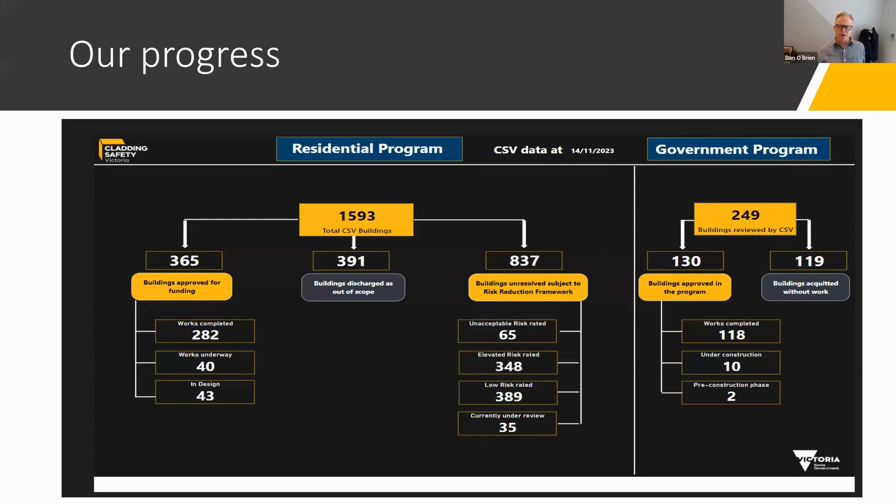Sorry, Dan, when you say risk, you're talking about risk to human life, aren't you? Yeah, that's exactly right, Kim. It's risk to human life, but it's also risk to the building. So what we're trying to do is limit the amount of exposure that a building may have to a cladding-related fire. So that's a really big and important part of it. If a building gets engulfed, but people can still get out, that's not success. So we're trying to reduce both risk to human life and risk of building damage, which I think is important from an insurance perspective.

Now, let's go back a step. What are we talking about? We're talking about different types of cladding on different types of buildings, right? And in Victoria, and I think this is a really important takeout from here, we have identified more buildings with different types of combustible material on them than anywhere in the world.

And that's because we've not looked just at the tall buildings where there's a vertical run of ACP polyethylene. In this picture here, you'll see that. This type of building configuration featured in the Neo fire in Melbourne and also the Lacrosse fire, where there was a fin of combustible material racing up the side of the building, and balconies were exposed. And in fact, the fire started on the balconies and raced up the outside.

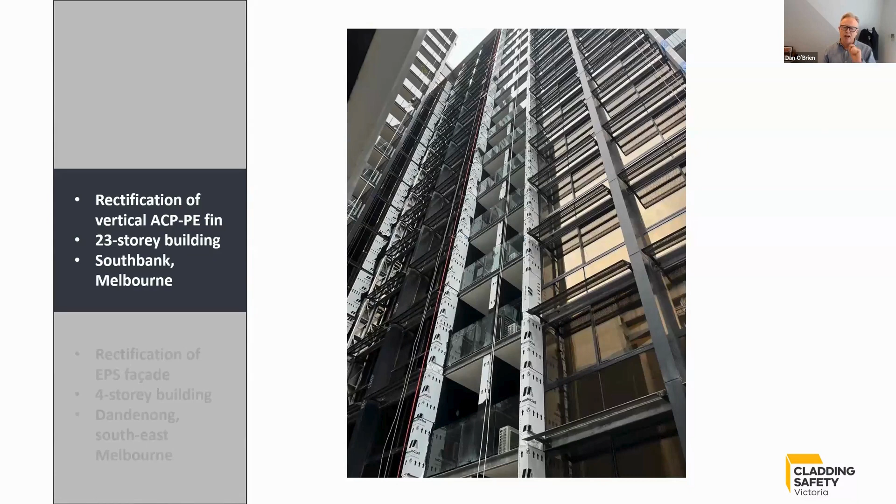Now, when I first joined this program, that's what I thought I'd be dealing with the vast majority of the time. And in fact, we've gone onto those very, very quickly to make sure we've been addressing those types of buildings. A genuine unacceptable risk on these buildings, 100%.

More often, in terms of the fleet of buildings we're looking at, it looks like this, right? This is a 4-storey building with expanded polystyrene. Expanded polystyrene is around about 10 centimetres in thickness, and it's just like an esky foam. And for those that haven't seen it, it is concrete rendered, and that's got about 10 or 12 mil of concrete render over the top of that.

Here we've delaminated that concrete render, and we've exposed the EPS, and you'll see at the bottom there the EPS extending to the balustrades, right? So there's a fair bit of risk on that particular building, and the EPS would be replaced with a product called Hebel, which is sort of a concrete-based product, and the balustrade probably would be replaced with a cement fibre sheeting, so a CFC sheeting, again, non-combustible materials.

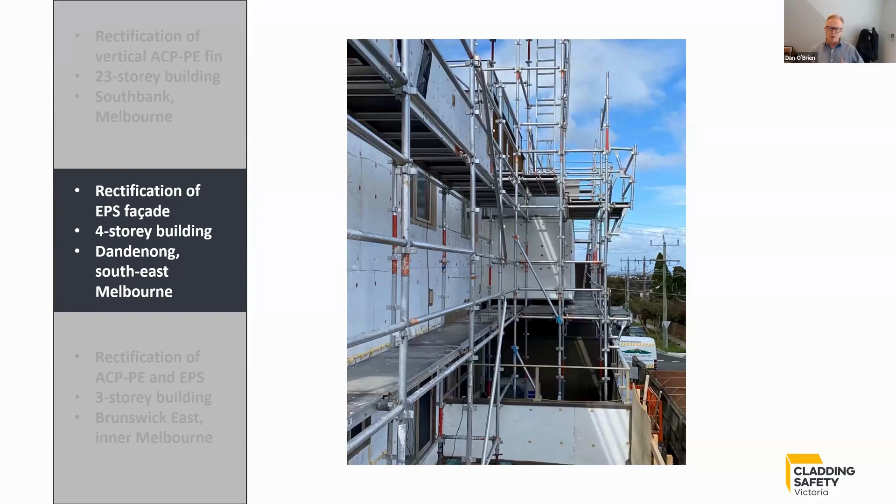So the 4-storey buildings and this type of building here, at the top, you'll see a mix. It's a 3-storey building with a mix of ACP PE, with a polyethylene core, and expanded polystyrene. And so this building would be no more than 9 metres in height. I want you to keep that in mind, because nowhere else in the world are people focused on buildings below 11 metres, right? And yet this type of building would represent about 40% of the fleet of buildings I'm looking at.

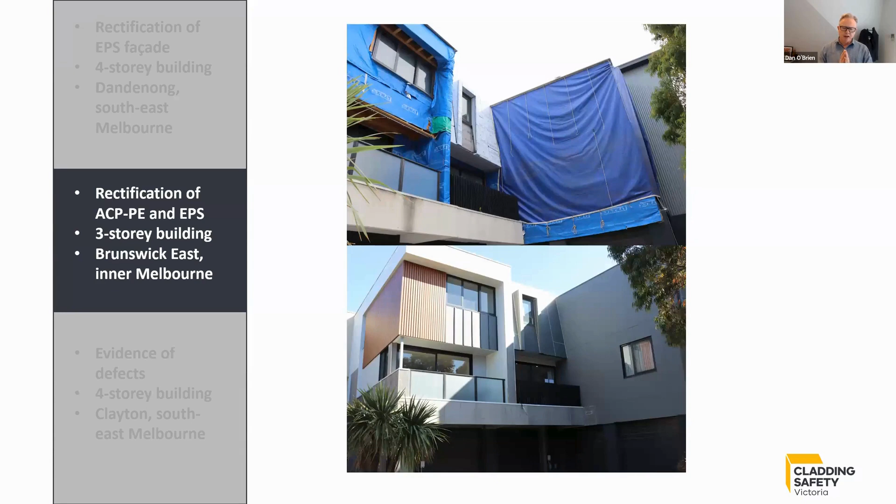Okay, so in Victoria, we've set the bar, we've had a low risk appetite to keep this product in the built environment. And we've looked at different types of products, whereas in other jurisdictions, they've really focused on ACP PE, polyethylene core, where the building is 18 metres and above. And I'll show you what that looks like in a moment.

So what are we looking at? This is a bit of a look at the different types of buildings that we've got around the world. You look up cladding fires on YouTube, and you'll see ongoing, horrific, escalating fires. And of course, we've had the fires in Melbourne that I've spoken about. That's the Neo building, a 42-storey building. You can see that vertical fin area going up, and it went up very, very rapidly. A fair bit of building damage, but fortunately no loss of human life or injury.

And the same with the Lacrosse fire in Melbourne, which, as the crow flies, would only be 200 or 300 metres away. Now we've seen the other buildings in Shanghai in 2010. I could put up a whole lot of other photos as well. Of course, the terrible tragedy in London in 2017. But if we look at the types of buildings that the rest of the world's focused on, it's not the buildings that we've got in the problem set in Victoria. And it's a really important point.

Because they've established a sort of de facto risk threshold to say those buildings aren't as risky because you can get out, right? Because first responders can get there and put the fire out quickly. Much easier to deal with those types of buildings. But in Victoria, the risk appetite has been set a lot lower. If you look at the bottom there, 49.4% of the buildings I'm dealing with are 3-storey, 24% are 4-storey, 8.3% are 5-storey. So really, the buildings that the rest of the world's focused on are 6 storeys and above, which would represent around about 18.3% of what I'm looking at.

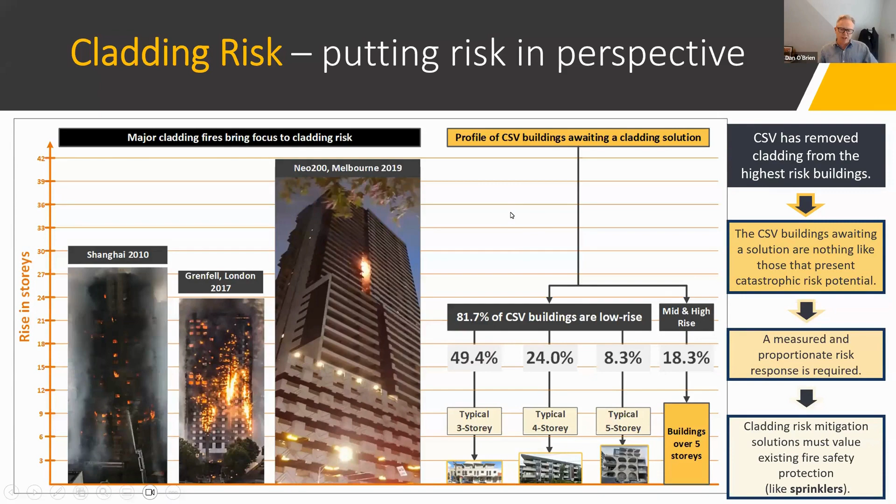It isn't typically the type of buildings that we're dealing with. We're dealing with buildings with setbacks. We're dealing with buildings that have got clusters of combustible cladding in certain spots. Sometimes where the cladding sits, it poses no risk whatsoever. There's no way it could ignite. And we've done a lot of work to work out how to mitigate that particular risk with different types of interventions. And we'll get onto that now.

But just to give you a sense of perspective, if you look at this chart, this is across jurisdictions. You can see Victoria is dealing with a hell of a lot of buildings compared to other jurisdictions. This is a bit out of date; the UK is now looking at buildings between 11 metres and 18 metres, but they're looking to adopt a risk-based approach for them. Prior to that, they were focused only on the 18 metres and above. And in the UK, in Scotland, the same.

So most of these jurisdictions are focused on those taller buildings or have a smaller problem set because they haven't looked for expanded polystyrene. Right, in Victoria we've looked at both products as being potentially risky. And I can't believe to see that amount of expanded polystyrene on a residential building, if low rise. It's absolutely amazing that that's one of the things that you've found.

Now there's been a question come through, and I wondered if you wouldn't mind answering from the Victorian perspective. Yeah. Kieran Conroy has asked, who bears the cost for the remediation, and is the government helping in any way? Yeah. So from a Victorian government's perspective, back at the end of 2019, they put $600 million towards this issue. But importantly, they put a levy in place, which is a cladding levy. It's based on the building permit, which we collect and we use to directly invest in the removal of the cladding.

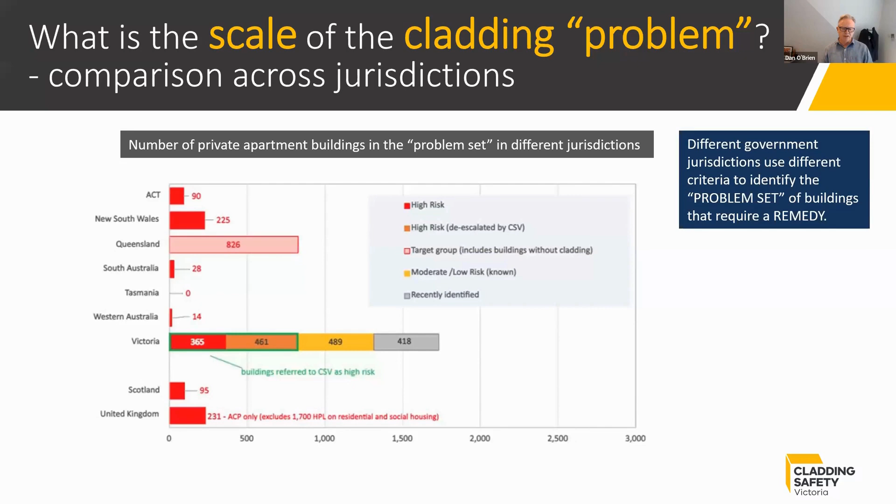Yeah, I'm aware of a building in one of the other states, a reasonably high-rise building, maybe 20 stories, and their cladding bill to remove some fairly severe cladding, obviously outside of this scheme, was $14 million. So that was quite the special levy that those owners had to raise, and it was a really huge decision for them. Yeah, it's a huge decision, right? Particularly in these 3 and 4 story buildings in the outer suburbs, it means some owners have negative equity. If they have to fund it directly, it's a considerable cost.

We've been able to use our approach to mobilise builders, get the approach overseen by a clerk of works program to make sure the quality is good. We've been able to control all that because it's not difficult work, but it can be tricky, and you're always interfacing with live buildings, right? People aren't leaving these buildings except in a rare instance. And so we're dealing with live buildings, and it's messy work, particularly with the removal of expanded polystyrene. It gets really, really messy.

And the tall towers are tricky. We've got people in dangerous situations removing this stuff. They're working off ropes. It's not something you want to do, really, as a builder. And it's very difficult after the event to deal with this stuff. But we've made great progress, and we'll have all of that cladding work retired by the end of 2025. So we're going well.

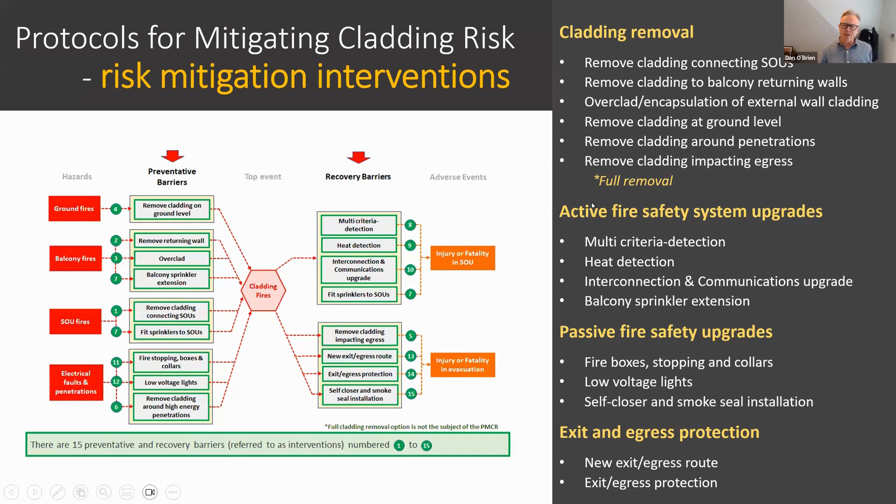It's incredibly interesting, though. I think the work that's been done as far as, you know, this classification of risk, looking across jurisdictions and also looking across frameworks that might not have necessarily previously been applied to residential buildings and that sort of thinking.

I think one of the things that stands out for me, and I'm wondering if you were surprised by this, is how, despite having one issue, cladding in residential strata buildings in Victoria, you can't have a one-size-fits-all approach for these issues, and that there's so much depending on the type of cladding, where it is, where the building is, the height of the building.

Have you had any surprises through your work on this? What surprised me, Kim, is that you actually start at the premise that no two buildings are the same, but then you realise as you look at them closely and you categorise buildings that they fit into certain cohorts, right? There's not too many builders build bespoke, right? They keep repeating the same designs,

and they keep on using, particularly through a period of time, and I'm talking sort of post-2000 to 2015 in particular, there was a particular type of building methodology that was occurring in Victoria, and I suspect elsewhere in the country. And so many of the buildings, like this one I've got up on the screen, that's pretty similar. We'll see many, many buildings like this, which will have different elevations of combustible material. This is an EPS building.

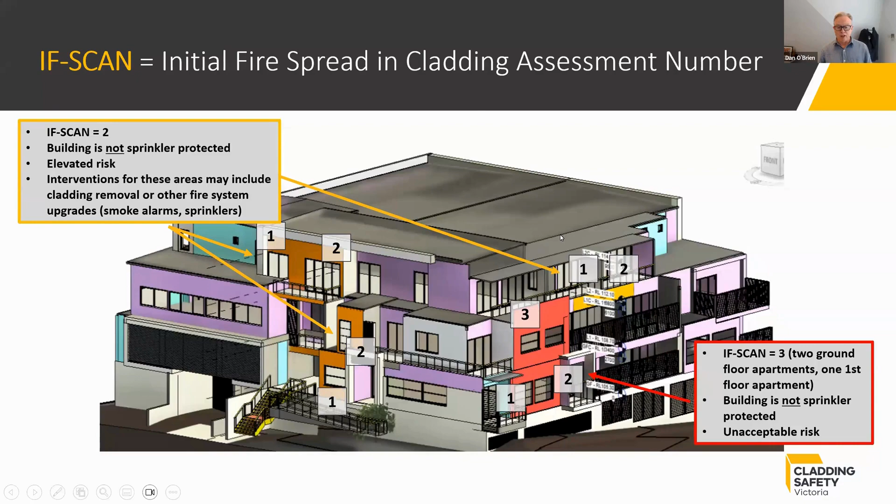But once you've got that, it means the state and local government, all the regulators concerned, are saying that it's okay. And that's the importance of what Steve was talking about before. Where we get that point of agreement, I believe that it should stand, and the owners will have that effectively on their title forever. We'll give them the advice and that particular rating, working through it building by building.

Now, I'm going to just change gears a little bit because here's an interesting one. I'm going to get Luke to talk to this in a tick. But one of the things we found when we started this, and it was a confused and emotive state, right? A lot of concern about cladding risk, and rightly so. But when you have an issue like that, it's really, really important to break it down bit by bit rather than conflate a problem.

What we found, even within the state of Victoria, as well as building practitioners, there was confusion about what to do with material that had a fire retardant in it. It was ACP, it had some polyethylene in it, but it had a key fire retardant ingredient. And so we've done a lot of work offline through testing labs to work out just how risky some of these products are. And that keeps going and it keeps informing our thinking.

But one of the things we do know is that ACP-FR, so that with a fire retardant in it, not just a low polyethylene count, has to have an active ingredient in it, a key fire retardant. It's still combustible, so it doesn't meet a particular definition of non-combustible material on an external wall, but it only burns in on itself. It doesn't lead to fire spread.

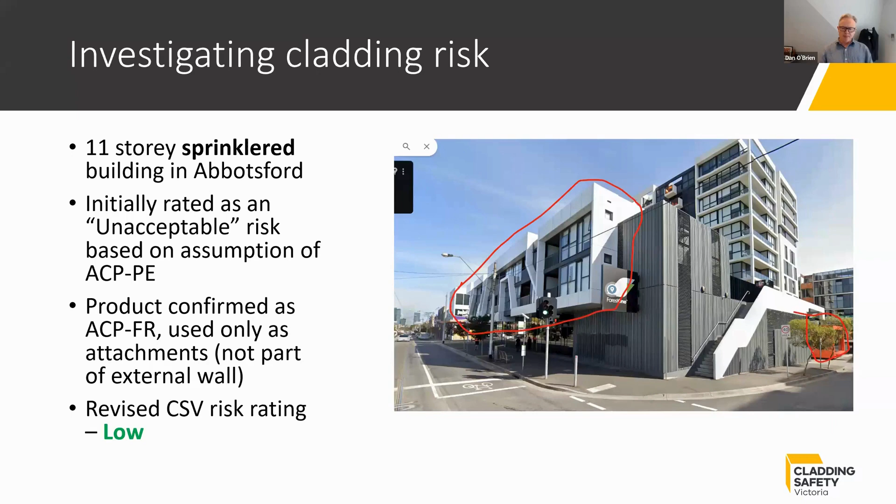And so that's a particularly important point. Luke, I might hand over to you. Thanks, Dan. And thanks very much, everyone, for attending today. It's great to have the opportunity to tell you about our work and the Victorian Government's approach to addressing cladding.

Just a couple of concepts I wanted to cover back off on with respect to some of the conversation we've had so far. And there's been some fantastic questions in the chat about this. There's been questions about compliance and risk. There's been discussions about PE or polyethylene and FR. There's been discussions about combustibility and non-combustibility. And there's been discussions about attachments in cladding. I'm just going to go through some of those very quickly because they all relate to the building that's on the screen at the moment. I'll just go through a couple of items from this building's history first, and then we'll return to those concepts because it'll illuminate why we chose this as a case study.

The Owners Corporation for this building hired an independent building surveyor compliance consultant, a very experienced building surveyor, because they noticed that they were having some significant premium increases as a result of cladding. In 2021, their premium went up by 10%. In 2022, their premium went up by 10%. In 2023, their premium went up by 15%, and at this stage was at a total of $14,000 a year, with a $2,000 excess having increased from $1,000.

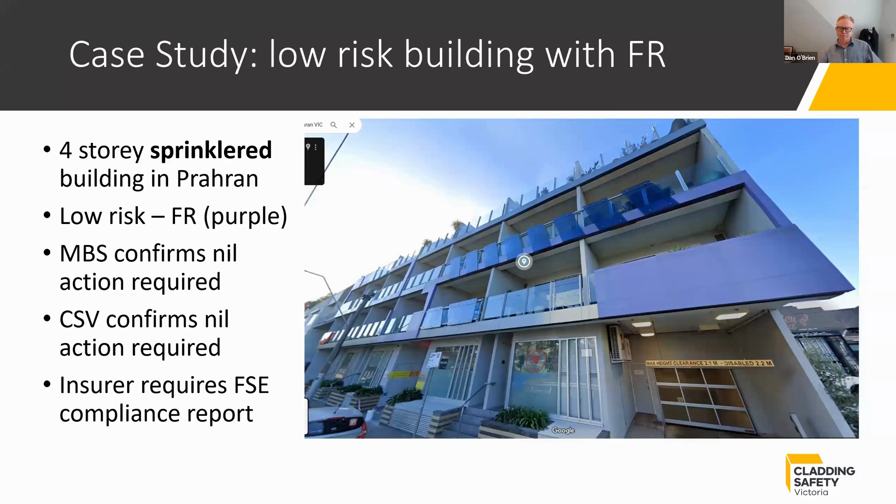Okay. I think I might just take an opportunity to respond there. I can see some questions in the chat. I think it's very important to say CHU, we know very well what we do in our company, but we can't respond on behalf of the entire insurance industry. And my experience between strata specialists even with this cladding discussion is that the approach will be quite different depending on the discussions they've had with their underwriters. So it wouldn't even be appropriate to try and surmise what others do.

But I would say I appreciate that this prevalence and focus on cladding has created work for owners. It's created work for strata managers, work for brokers in trying to ascertain what is actually on the outside of this building. And there's been a lot of instances where it can be really difficult to get that information. Do I like the idea of someone saying that looks like it's got cladding on it? No, not really. There should be reports in place at this time. We're far enough down this road that people typically know what is on the outside of their building.

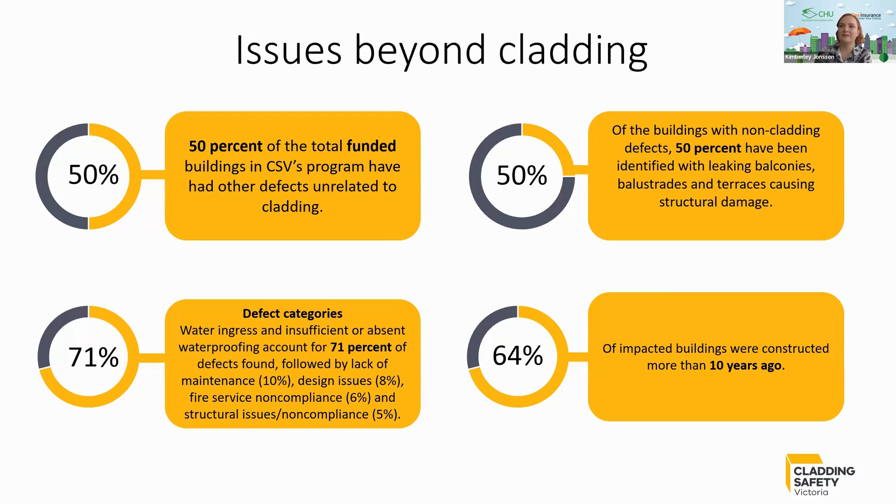Right, that's for those that like word pictures. So that's what we've done, and that's increasing. But that means we've had an opportunity. 12 MCGs' worth of combustible cladding. Yeah, that must make you feel better and sleep better at night. It's certainly better than when I started, I can tell you. So we've got a huge amount off, and that means a huge amount of buildings have been de-skinned, and you can look at what's behind the skin.

It's like a forensic autopsy of a building, and it's not pretty. 50% of the buildings we've dealt with have had substantial non-cladding related defects. And the ones that trouble me the most are around the water ingress that really erodes the integrity of the structure. We've published this on our website, and we'll continue to do it. We've got water ingress issues leading to leaking balconies and structural deficiencies on balconies, so they're unstable.

With balustrades that wobble, that with just a little bit of human weight against them would collapse. And I'm surprised not more of this has occurred. I think this is probably one of the more significant issues in the built environment that needs to be dealt with. It's the nature of water ingress in buildings ruining the substrates, rotting the substrates and impacting the structural integrity of the building, particularly the tie-ins.

So when the balcony comes into the building in a timber frame situation, I'm not talking about the concrete balconies here, I'm talking about the timber frame walk-ups that we've been dealing a lot with. Many of them are between 5 and 15 years old where these problems start getting created. It's substantial, and it's something that we've been concerned about and reporting up. Not to mention the mould that sits within buildings as a result of that water ingress, and that's also been significant. We're circulating a report across government about the extent of that in the program.

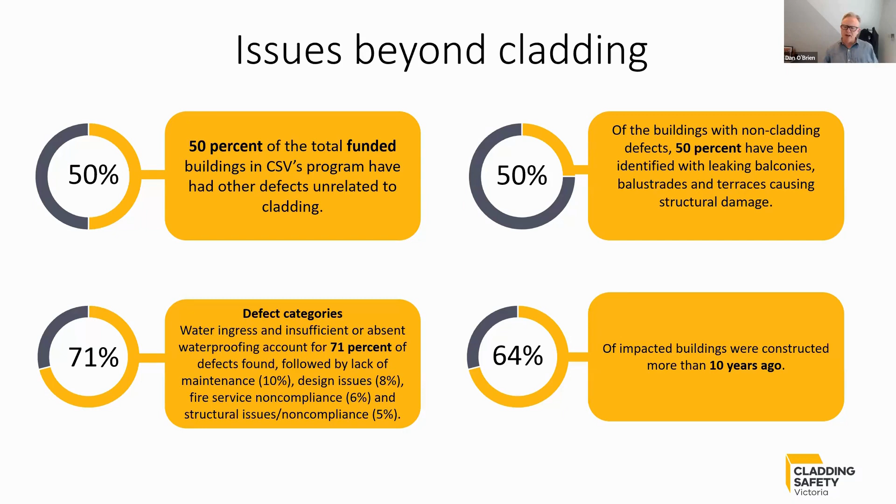I won't go through these stats, but 50% of all the buildings we've dealt with to date had defects. 50% of those have got dodgy balconies. Most of it's due to water ingress, and 64% of them are just over the 10-year mark, 10 years or more. Now, this is a bit of an example, a picture horror show here.

If you look at the top picture from the outside, it looks okay, and we started to take this cladding off, and it was a horror show. What was even more frightening is that there were for sale signs all over this front area at the time we got there, and they were continuing to sell apartments. As we took more off, this building is now the slowest building in our program. The owners have to come to the party to fix these defects and fund them. It'll probably be the last building we finish. But it's not alone.

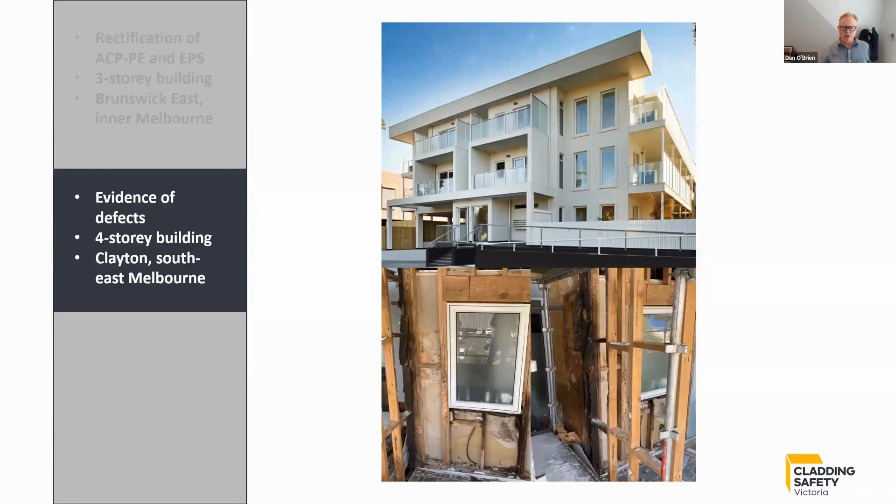It might be the most exaggerated example of what we've got, but it's not alone, right? And that's probably the story. I'm just going to play a little video about what we're seeing.

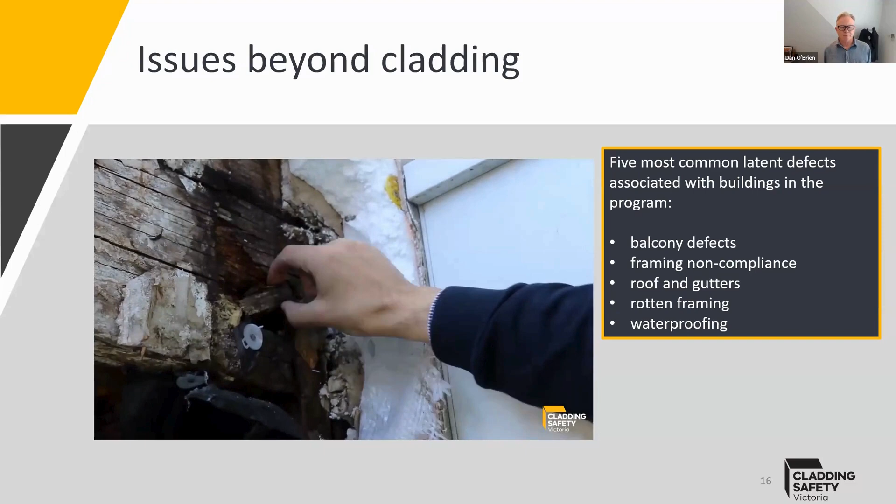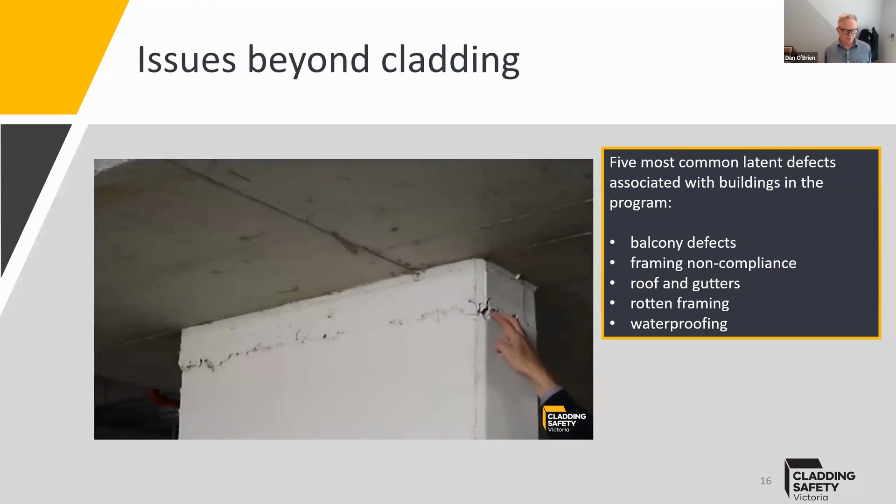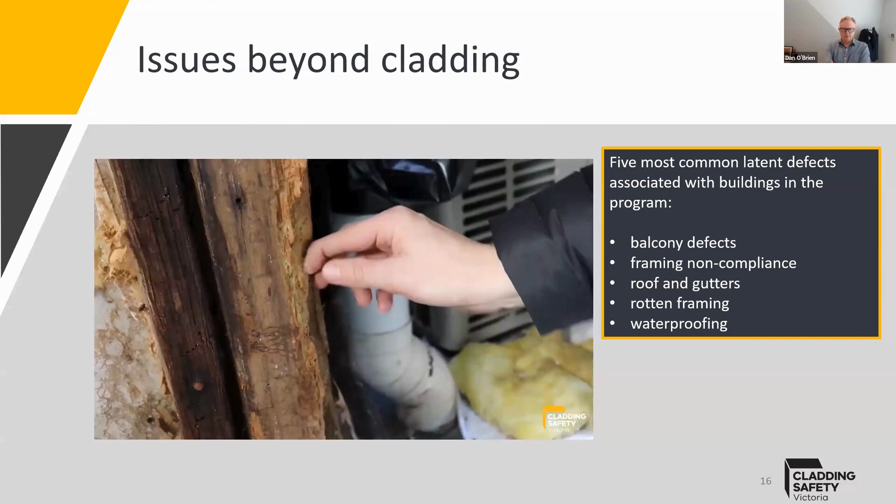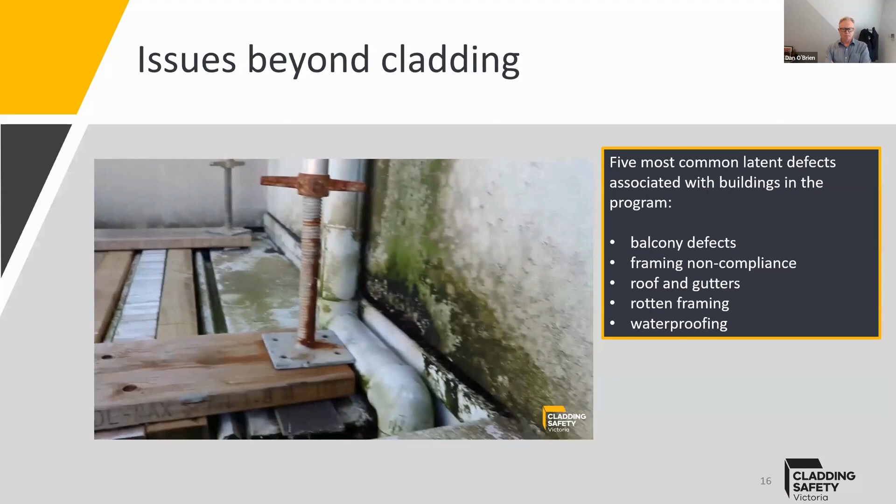We're finding things, defects, non-compliant works, issues relating to elements such as external weatherproofing, waterproofing, and roofing, particularly the flashing detailing. There's issues with the steel, timber, and reinforced concrete structures. We're finding non-compliant service installations, inadequate or entirely missing fire rating and fire compartmentalisation, inadequate protection and pest proofing of the building. We're finding non-compliant stormwater and plumbing installations, inadequate cross falls and falls away from the internal spaces to the external wet areas, severe and widespread mould and rot ingress issues, incorrectly installed and engineered balustrades, and pre-existing leaks from various sources.

So Kim, that's just an example. I've got the long version of that, but I won't play. Yeah, no, genuinely, I believe you.

So at CHU, we have always in strata seen buildings with defects, but I think nearly half of the strata title buildings in Australia have been built in the last 20 years. And I think what we have seen is a prevalence of building defects through that building period. In New South Wales, we've seen the appointment of the Building Commissioner, David Chandler. He's about to receive new powers. But certainly the quality of some of those newer buildings can be really poor.

Some little stats. Half the buildings that we have on risk that have the defects flag are in Victoria. Probably the rest of them are in New South Wales. But actually, for the people on the call, probably about 80% of the buildings with defects that we do new business quotes for are in New South Wales. So it's really high prevalence in New South Wales, and that's issues around the code and private certifiers, which are all being addressed.

And bringing it all back together, we know there's a lot of work to be done around defects, and as you're alluding to, it's a lot scarier than any of the things we're seeing with fire safety remaining, except for where the defects actually affect fire safety, like what you've seen with separation. But I think what we're going to see moving forward is a better standard and a better quality of building, because these issues have been brought to light.